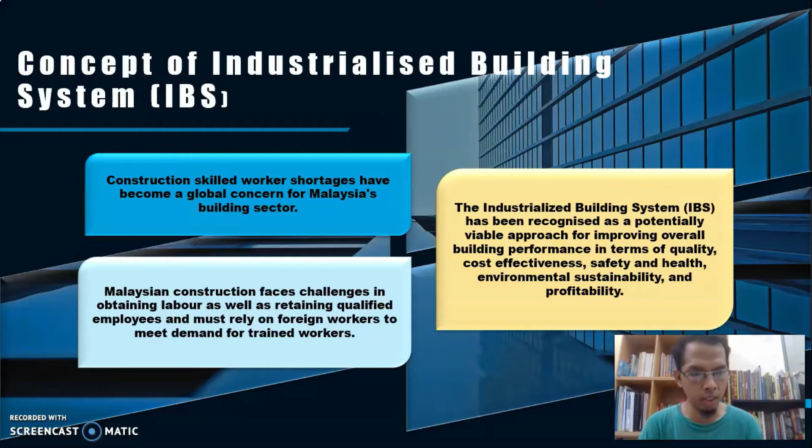As for Malaysia's construction industry sector, it has many problems. Among them is the construction skilled workers shortage, which has become a global concern. Our industry also faces challenges in obtaining labor as well as retaining qualified employees, and we must rely on foreign workers to meet demand for trained workers. IBS has been recognized as a potentially viable approach for improving overall building performance in terms of quality, cost effectiveness, safety and health, environmental sustainability, and profitability.

Next, we're going to the framework of IBS. The story of IBS starts from when the government and allied business agencies made several attempts to address the numerous issues in the construction sector. According to the Scottish Government's procurement agency, the conventional building approach is expensive and incapable of meeting the increasing demands. It has been criticized for failing to build effective teams.

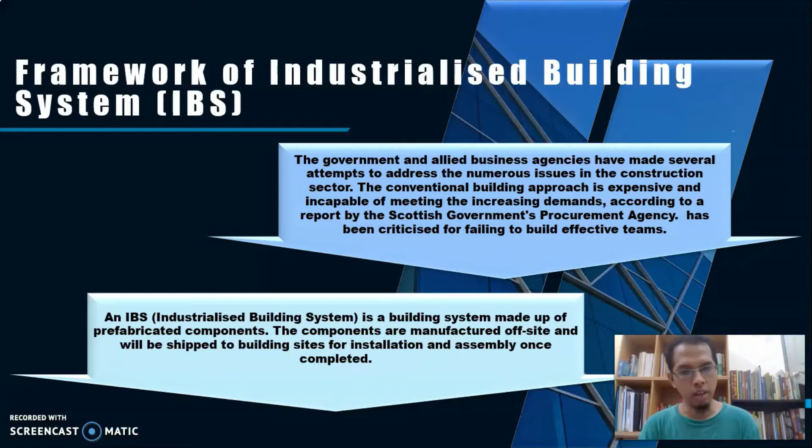IBS is a building system made up of prefabricated components. The components are manufactured off-site and shipped to the building sites for installation and assembly once completed. The construction industry has begun to adopt IBS as a way of improving building quality and productivity. It provides less waste, fewer site materials, a cleaner and neater atmosphere, regulated quality, and reduced overall construction costs.

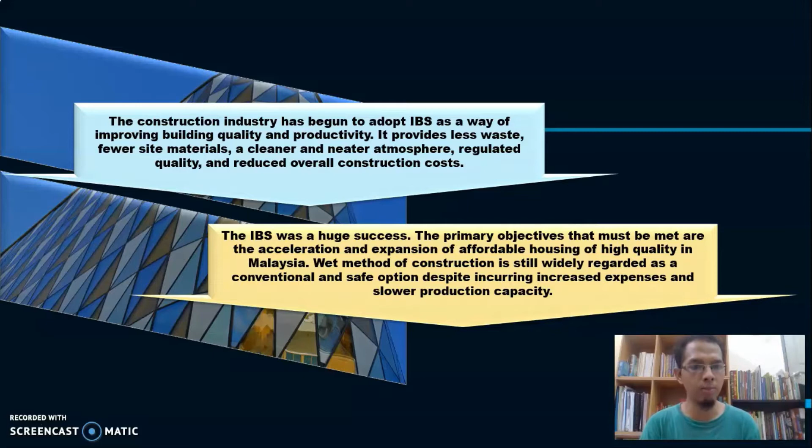IBS was a huge success for the construction industry in Malaysia, as well as globally. The primary objectives that must be met are the acceleration and expansion of affordable housing of high quality in Malaysia. Many of us assume that conventional construction is still widely regarded as a safe option, despite incurring increased expenses and slower production capacity.

Next, we're going to the classification of IBS in Malaysia. As we see on the slide, it has 5 types of IBS components, which we will go through one by one on the next slide.

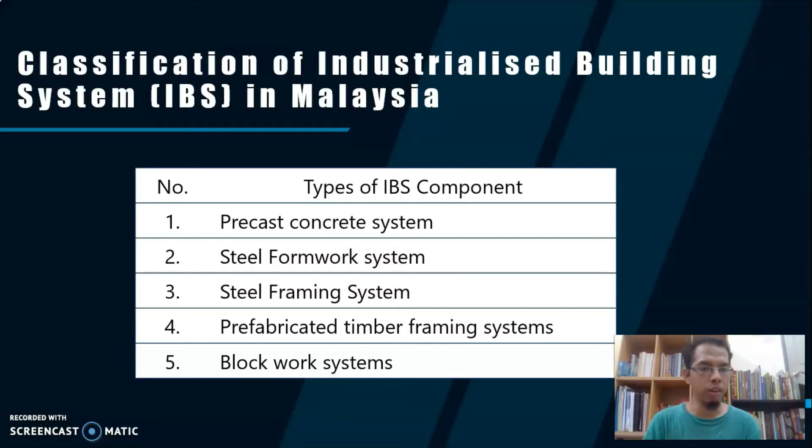First, we go into the precast concrete system. The precast concrete system is the most often utilized group in IBS. It has been used not just in the construction of buildings, but also for the construction of infrastructure. There are many types of precast concrete, such as columns, slabs, walls, beams, and permanent concrete formwork components.

Next, we go into the steel formwork system. It is a low-level, or least prefabrication, IBS type of formwork. As we've commonly seen in the construction of buildings in Malaysia, many use timber formwork systems instead of steel formwork systems. The benefits of using the steel formwork system are that it provides high quality finishes and quick construction with fewer on-site labor and material requirements.

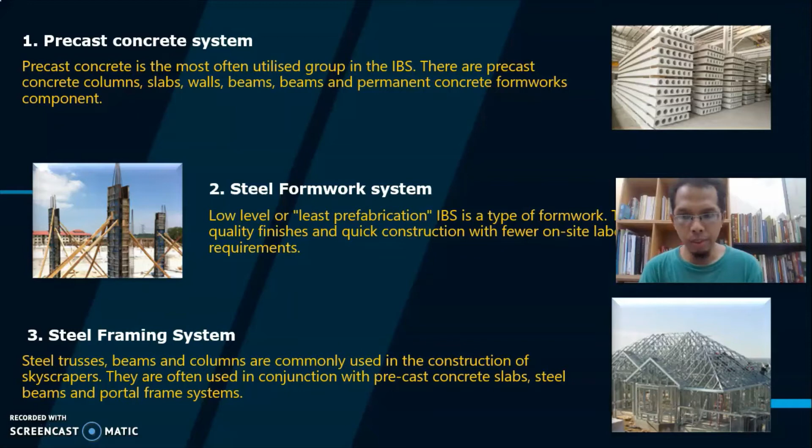As we can see on the diagram, the construction of the steel framing system is using trusses for the rooftop. But it's not just trusses that are used for the steel framing system; it also has beams and columns for the framing system, which are commonly used in the construction of skyscrapers. They are often used in conjunction with precast concrete slabs, steel beams, and portal frame systems.

Next, we go into the prefabricated timber framing systems. The timber building frames and wood roof trusses are the products of the prefabricated timber framing method. The timber building frames have their own specialized market, where they provide a range of designs from modest living units to construction needing high aesthetical values.

Next, we're going to the block work systems. Commonly, we've seen that building construction in our country uses either concrete brick or red clay brick. For IBS, it has its own blockwork system. Concrete masonry units and lightweight concrete blocks have changed the building process compared to traditional bricks in the construction of new homes. The difficult and time-consuming traditional bricklaying process is considerably reduced by adopting this excellent alternative technique, as experts say.

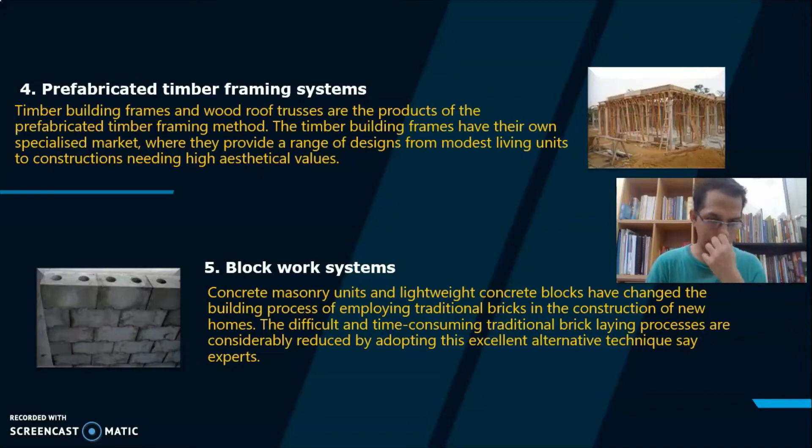Okay, so right now it's about the case study. That's all for my presentation.

Hello, Assalamualaikum. My name is Daniel, and for the next slide I will talk about the case study of this report. The building we chose is a twin one-story residential building, part of a residential development project currently located at Lot PT 4727, Kawasan Pertubuhan Desa Batu Pertangkup, Mukim Chuping, Daerah Kangar Perlis.

The residential area is a project created by Perbadanan Kemajuan Ekonomi Negeri Perlis, PKENPs, and it was built by QCons Home Sendirian Berhad.

Next, I will talk about the features of the IBS components that can be seen on the building. First is the precast concrete column. A precast concrete column is a column used to support beams for extra tensile and compressive strength to resist construction stresses. The load is distributed and the weight of the beam is supported by corbels.

The structural framework of the structure is composed of columns and beams. The column itself is a load-bearing element in a building's structural system.

Next, I will talk about the precast concrete wall. The wall panels are lifted and put in proper places for the structure after the concrete is solid enough. Tilt-up construction is the term for this approach, and today's cranes are used to raise and place such walls, allowing casting to reuse single forms. Some wall units are made in factories where the shape, material quality, and finish may be more regulated.

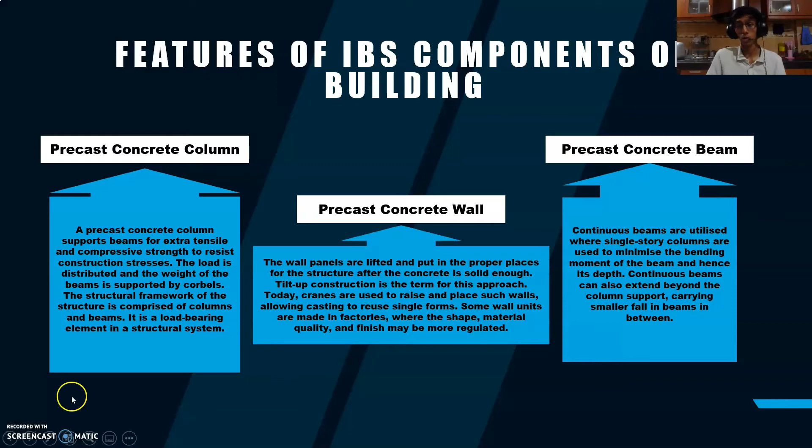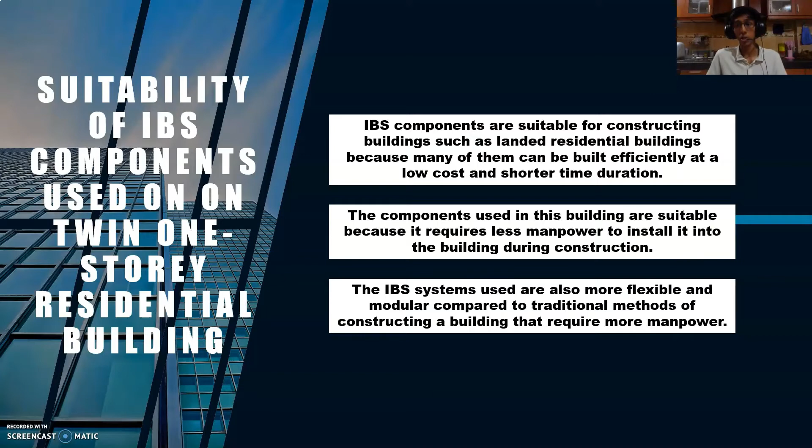The suitability of IBS components used on this building is that IBS components are most suitable for this building type because it's a landed residential building, and many of them can be built efficiently at a lower cost and shorter time duration. The components used in this building are suitable because they require less manpower to install during construction, and are more flexible and modular compared to traditional methods of construction, which require a lot more manpower, equipment, and other resources.

Next is the fabrication process of precast columns and beams. Firstly, the column and beam molds are assembled and the measurements are within the required specification for the building.

Then, before the construction of the casting panel, the level and flatness of the base mold will be verified. Then the mold will be cleaned and a mold release agent is uniformly applied on the mold surfaces.

The length and dimensions of the rebar and pre-stressing strands are verified against the design before they are placed into the mold. Before casting, a sufficient number of spacers of the suitable size should be carefully inserted and fixed.

Before pouring the concrete over the mold, a concrete slump test is performed to confirm the strength and quality of the mix meet the required safety standards. A suitable curing period is maintained to ensure all precast components are exposed to the same and appropriate environment.

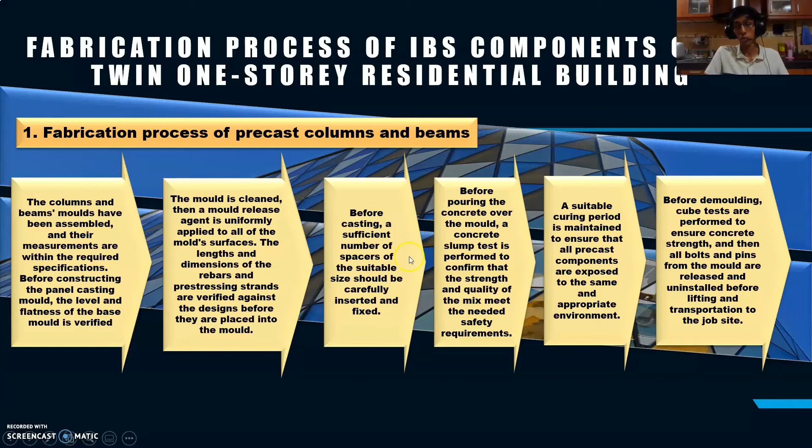After that, before demolding can be done, cube tests are performed to ensure concrete strength, and then all the columns and beams are released and uninstalled from the molds before lifting and transportation of the components to the job site. Next is the process for the precast wall.

Before constructing the mold for panel casting, the level and flatness of the foundation are checked.

The mold dimensions are verified to confirm they are within the established specifications required. Next, using removers or scale bars, the mold will be cleaned and removed of dirt and old mortars. The size, spacing, and length of all rebars are verified against the design of the building itself.

Now the placement and securement of pre-stressing strands such as corrugated sleeve pipes, recesses, and lifting hooks must be done appropriately. Then casting, vibration, and compaction will be carried out during the final inspection. At this point, the concrete spread is already leveled. During concretion, a power trowel or float is utilized to provide a smooth surface finish.

After that, observation will be done to observe proper curing time and the ideal temperature. After observation, before lifting the component itself, loosen and remove bolts and pins. For pre-stressed components, strands are also severed before lifting. Then, before moving to storage, the condition of the final product and its dimensions are thoroughly examined.

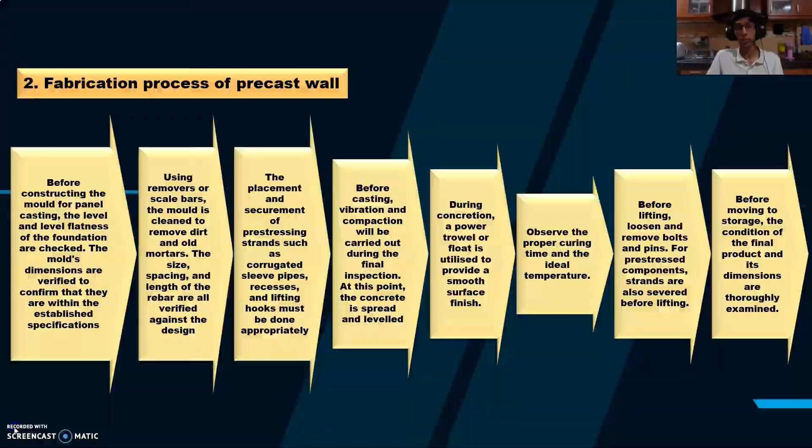Assalamualaikum, I am Zaiti Zafira. I want to explain about the connection detail of IBS components on a twin one-story residential building.

It's about the design and implementation of joints and connectors, which are the most essential considerations in precast concrete construction. Bolting, welding or grouting are some of the other options for creating a good connection.

First is a column to base connection. It is the most cost efficient and simple to use. The precast concrete column is manufactured with a corrugated sleeve, then stuffed with flowable non-shrink grout. It must remain propped until the grout has hardened.

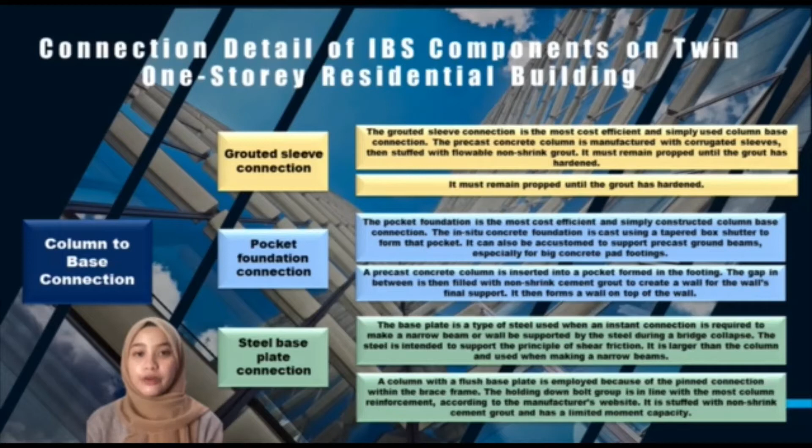Second is a pocket foundation connection. It is the most cost efficient and simple to construct. In situ concrete foundation is cast using a tapered box shutter to create that pocket. It can accommodate to support precast ground beams, for example, for big concrete pad footings. The precast concrete column is inserted into the pocket formed in the footing.

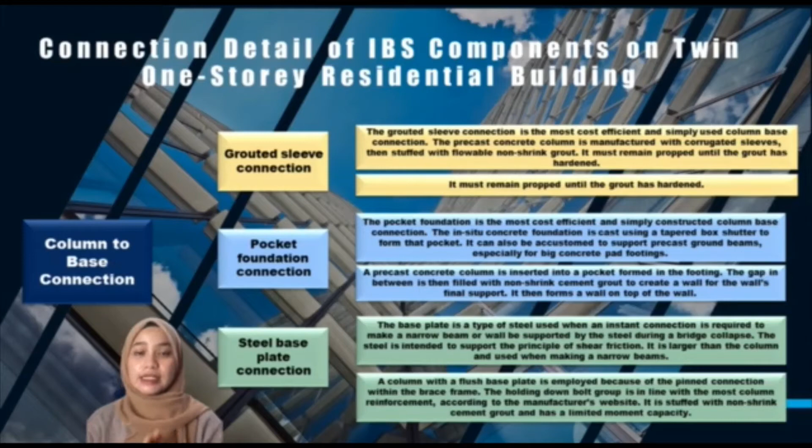Third is a steel base plate connection. It is a type of steel used when an instant connection is required to make a narrow beam or wall supported by the steel during a bridge collapse. The steel supports the principle of shear friction, and it is employed because of the pin connection within the brace frame.

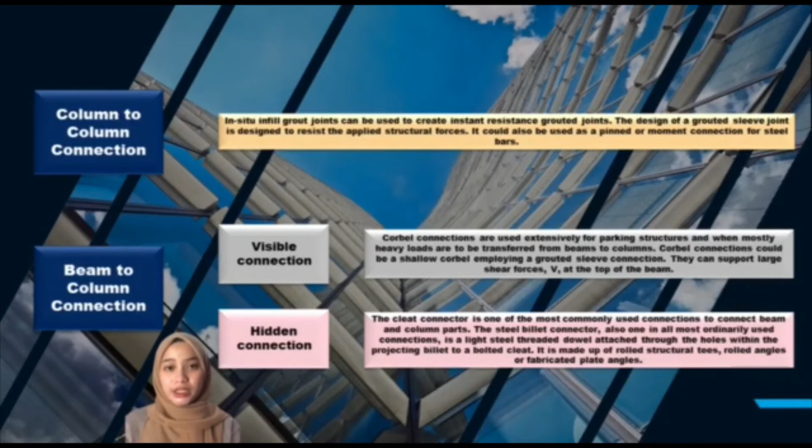Second is a column-to-column connection. Cast in situ infill grout joint can create an instant resistant grouted joint. The design resists applied structural force. It can also be used as a pin or moment connection for steel bars.

Third, beam-to-column connection. It has two types: visible connection and hidden connection. Visible connection is a corbel connection used extensively, especially for parking structures, and heavy loads are transferred from beams to columns. It could be a shallow corbel employing a grouted sleeve connection, which can support the large shear force at the top of the beam.

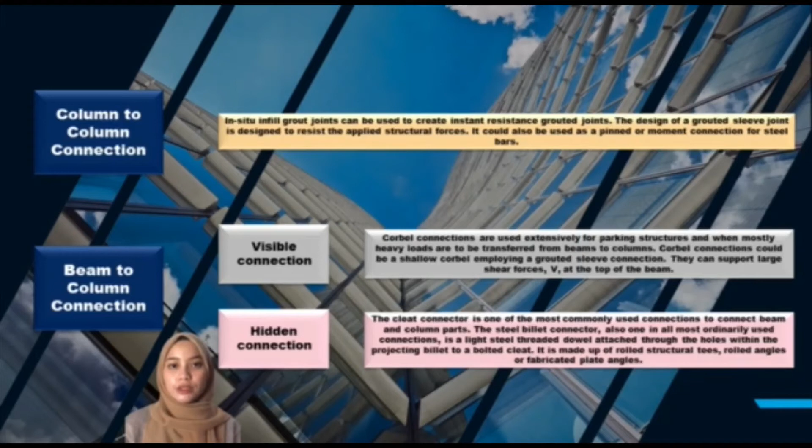About hidden connection: the cleat connection is the most commonly used connection for connecting the beam and column. The steel billet connector is also the most ordinarily used connection. It uses a light steel threaded dowel to attach through the hole within the projecting billet to a bolted cleat.

Next is a beam-to-beam connection. The nib at the primary beam is attached to the tie steel between the beams.

And the last connection is wall-to-wall. It has two types: horizontal and vertical joint. Horizontal joint lapping is the widespread used in situ concrete and tie steel, as a welded wall connection. It can create a lap between two parts of a building or structure, created by grouting a bar extending from one unit into the corresponding unit duct.

Vertical joint is a vertical precast wall joint, or uses cast in situ type of joint. A horizontal reinforcing bar from a precast panel projects into the joint zone where it overlaps or is welded with another reinforcing bar. Embedding plate, bolt and weld can be used to connect the two panels.

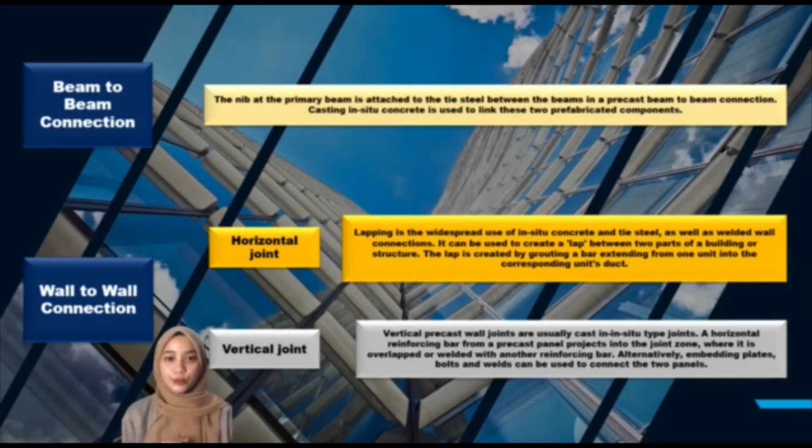About the procedure of installation of IBS components on a twin one-story residential building: first, excavation. Using tools, equipment or explosives, remove soil, rock or other materials. It entails moving, trench digging, tunneling, tools and resources, and underground construction. Second is installation of foundation ground beams.

On the excavation, precast concrete pad footings are constructed. Third is erection of precast column. The footings are fastened to the precast concrete column, and concrete is used to cast the joint connection. The columns are connected vertically with rebar in the center, reinforcing the bond. Bolts connect them, and the bolts are grouted.

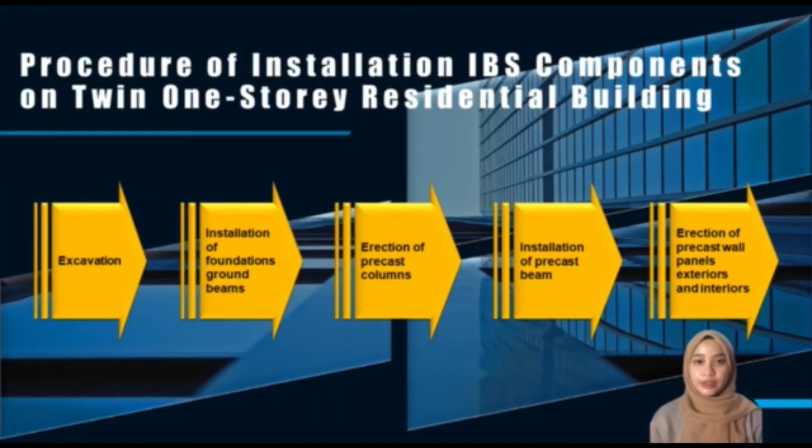Last is erection of precast wall panels, exterior and interior. Between the skeletal structure, wall panels are slid into their designated location. To secure the wall, the space is filled with grout.

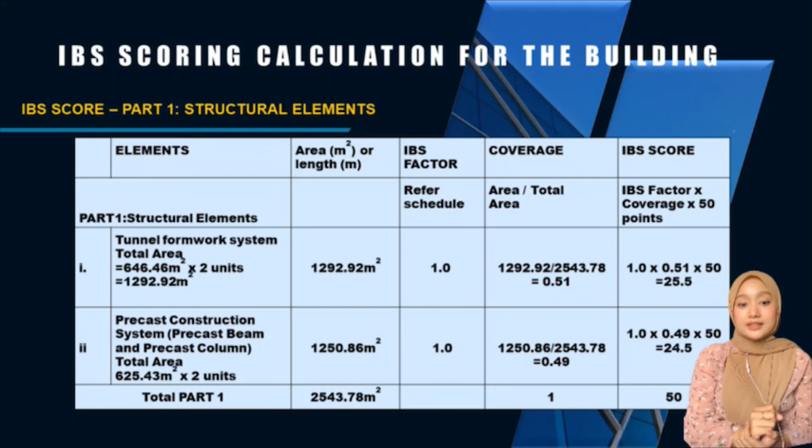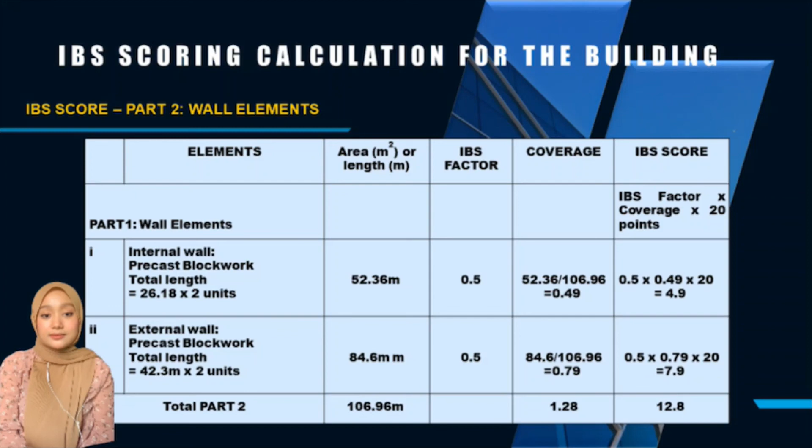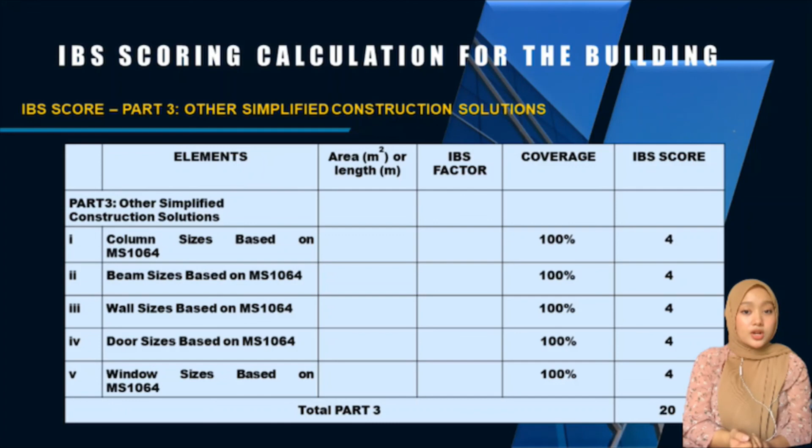For all these part 3 items, the coverage is 100% and the IBS score is 4. So the total for part 3 is 4 plus 4 plus 4 plus 4 plus 4, so we get 20 for the total of part 3.